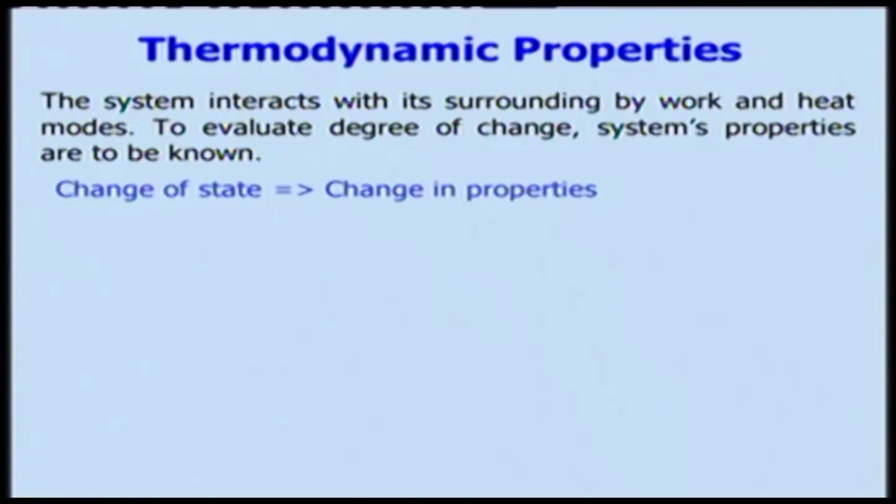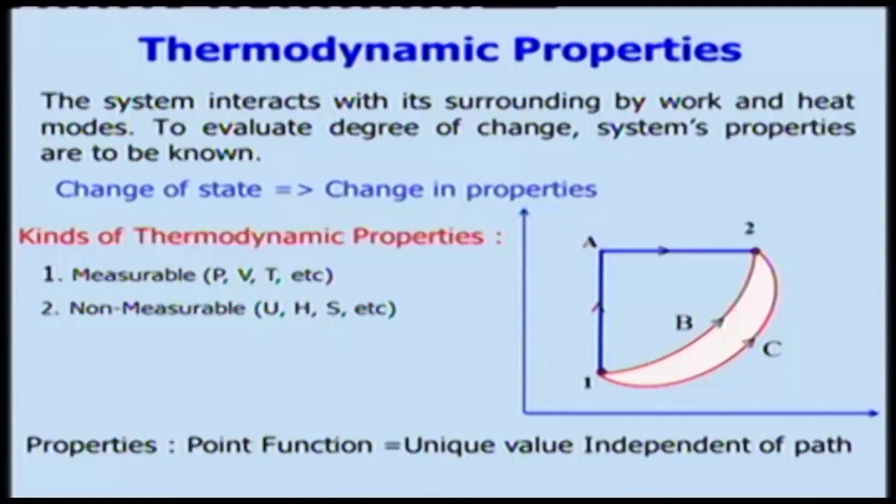So, what kinds of thermodynamic properties will we be handling? In other words, how can we classify them? We can classify them into two kinds. One is measurable properties like pressure, volume and temperature, which we can measure. But there are some non-measurable properties like internal energy, enthalpy, entropy, Gibbs free energy, Helmholtz free energy and other things.

So, we need to learn how we can obtain those non-measurable properties by using the data of measurable properties. That means we need to create ways and means of connecting the measurable and non-measurable properties, which we will be doing later on. But here we will be looking at these properties for a pure substance, because substances can be of various kinds.

Question arises: what do you mean by pure substance? For example, if I take brass and copper, can I call it a pure substance? Is brass a pure substance or copper? Which one? Naturally copper. But is that the sense we talk about here? So, what do you mean by a pure substance?

For example, if I take nitrogen gas, and I take air having constituents of mainly oxygen and nitrogen, neglecting other gases, can I call it a pure substance? Air I cannot say is a pure substance, am I right? Some of you are agreeing with my statement that air cannot be a pure substance. We will see as we go along whether you are right or wrong.

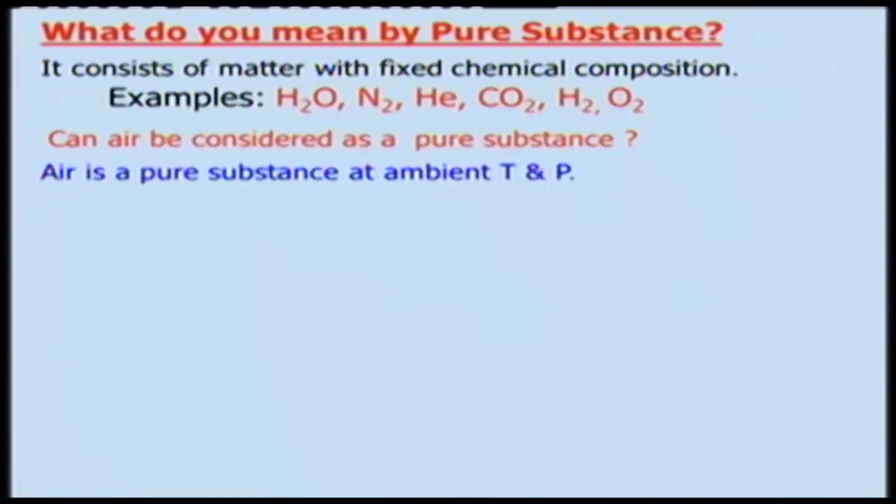You cannot separate the oxygen from nitrogen unless you do some separation procedure, like some kind of membrane you will have to use to separate it. Or how can I separate oxygen from nitrogen? One can think of using a membrane. Is there any other way of doing it? How? You can think of liquefying it, right. If you liquefy it, then one can think of separating it out. So, at ambient temperature and pressure, it will be uniform in chemical composition. Therefore, we can call it a pure substance.

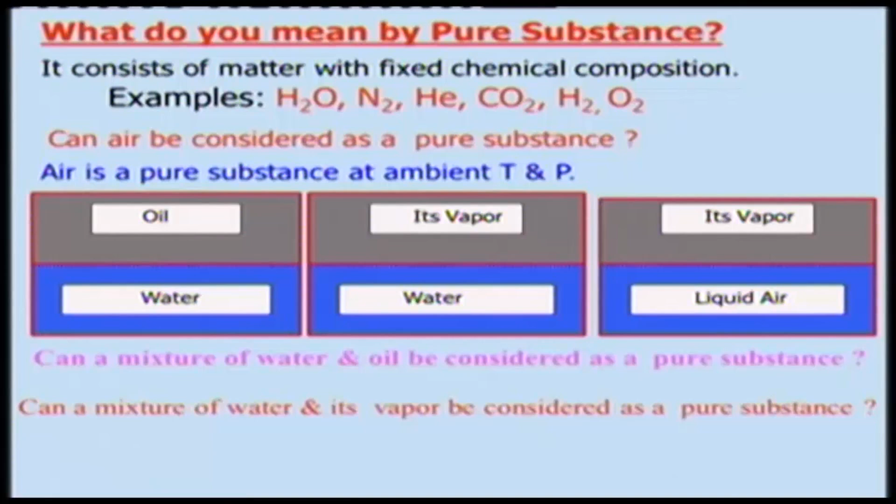Let us say water and oil, right, what will it be? Can a mixture of water and oil be considered a pure substance? Similarly, if I take water and its vapor, can I call it a pure substance? And if I take liquid air and its vapor, can I call it a pure substance? These are three examples I have given. Liquid air and its vapor cannot really be a pure substance, yes or no? Because the compositions of the liquid air and its vapor need not be the same. So, therefore, it cannot be.

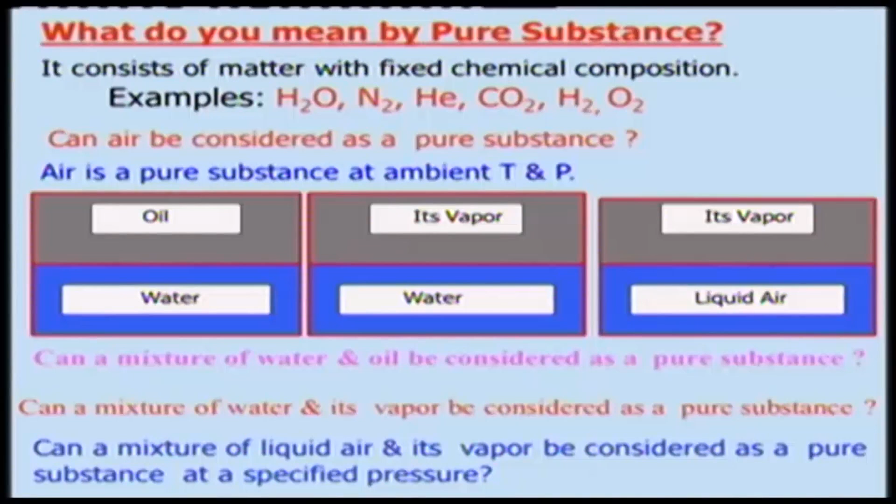And similarly, for water and its vapor, can we call it a pure substance or not? We can definitely, because the same water molecule will be there, whether it is in the liquid state or the vapor state. So, therefore, we can call it a pure substance. And water and oil we cannot really call a pure substance, because they have different compositions.

So, now we will be talking about a phase. What do you mean by phase? Phase is basically a distinct state in which matter remains homogeneous physically and chemically. If it is chemically homogeneous, what do we call it? We call it a pure substance, right. But here not only chemically homogeneous, it should be physically as well. A common example: in summer you get some ice water. The ice is in the solid phase and the water is in the liquid phase.

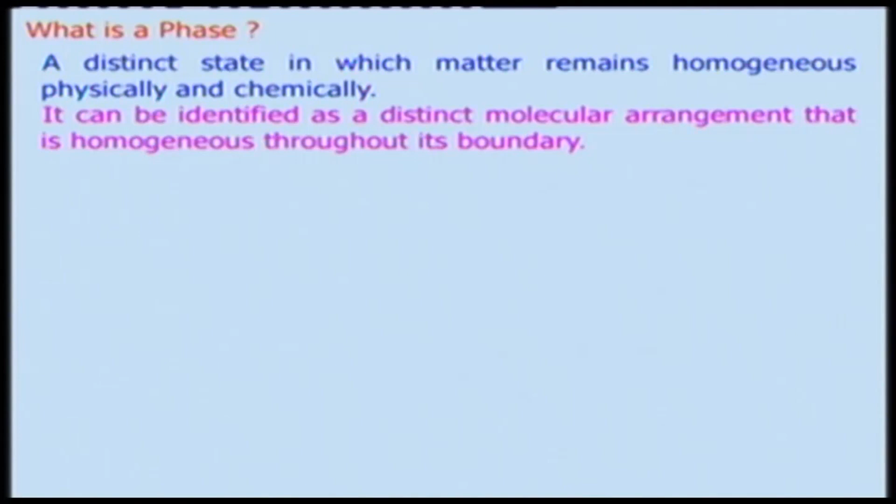This can be identified as a distinct molecular arrangement that is homogeneous throughout its boundary. As I told, the ice will be solid, so it will have a distinct boundary, and that boundary which separates it from its liquid we call the phase boundary. Another example: this is water and its vapor, and this is the phase boundary, where water can be converted into vapor. There is a water level you can see, and that itself is known as the phase boundary.

So, phases can be broadly divided into three categories: solid phase, liquid phase and vapor phase, right. And thermodynamic properties of a substance change abruptly at the phase boundary, right. Yes or no?

Although certain properties, like intensive properties, for example pressure or temperature, will be remaining constant, there will be change of certain properties of the substance across the boundaries. For example, if you look at water and its specific volume, will it be the same as that of its vapor? It will be very different, right. Order of magnitude difference will be there.

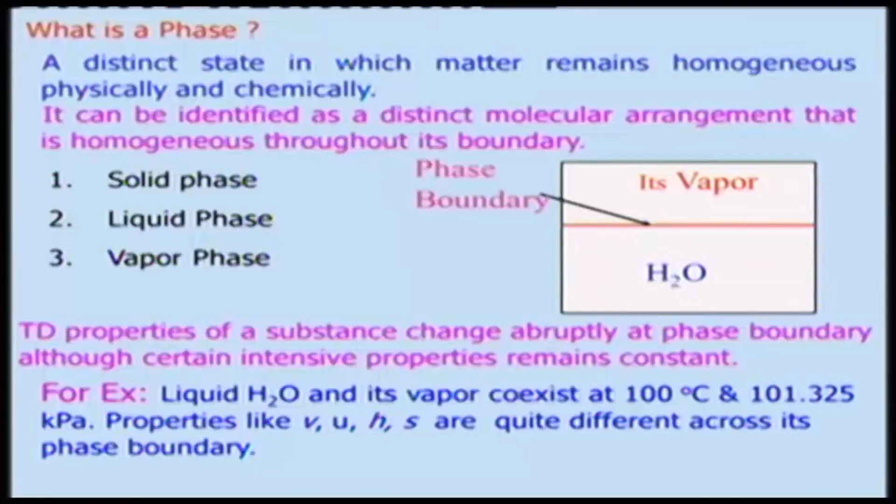To make it more concrete, liquid water and vapor coexist at 100 degrees Celsius and 101.325 kilopascals, but properties like specific volume, internal energy, specific enthalpy, entropy are quite different across its phase boundary. If you look at the numbers, the liquid and vapor will be quite different, which we will see either in this lecture or in the next lecture.

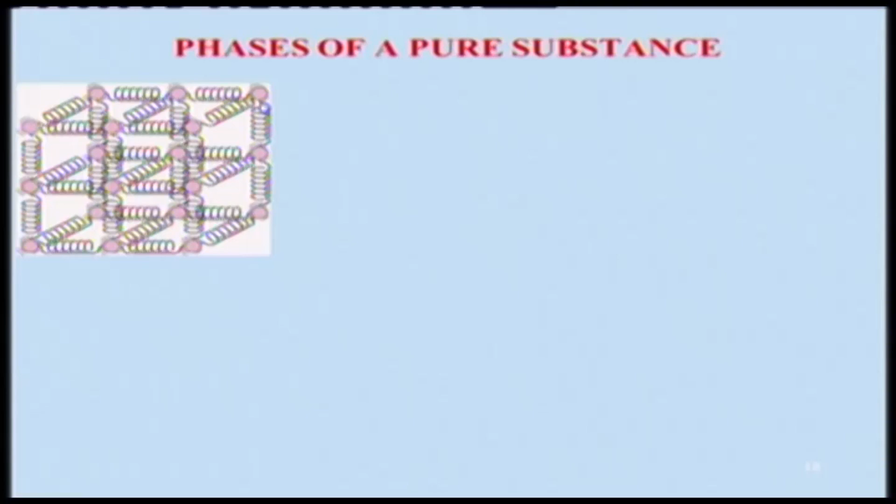So, let us look at the phases of a pure substance. This is a solid, which can be considered as a spring model. These are the molecules sitting over here, as if connected with a spring, and these molecules in a solid are kept at their position by large springs, like intermolecular forces. This is a model; what exists between the molecules in a solid is the intermolecular forces, which will be quite large, and there will also be repulsive forces.

Repulsive forces will be there only when these molecules come very close to each other, when the distance between the molecules tends towards 0. These molecules will be vibrating, and they are repeated. This pattern is what we call a lattice structure. It will be repeated, and they will be together. The intermolecular forces are quite high.

If you consider the earlier days in our family system, there was a lot of intermolecular force; people could take more resistance. If you apply a force or stress, they could take it, and today it is not, if you consider.

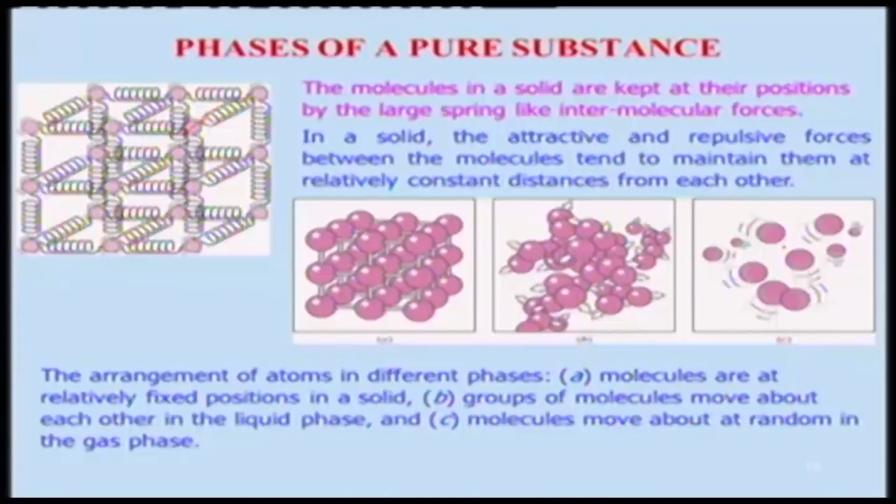So it became a fluid or a liquid, and if you give more energy, then they separate out, the molecules will be far away, and they move in a random manner in the gas phase. They will be interacting, but very rarely, and the interaction takes place through molecular collisions.

If you look at our country, in earlier days people had a lot of forces, togetherness was there, and a few years back we were liquid, now today we are in gaseous state and moving randomly, although each molecule has a higher energy level. Therefore we get a lot of stress and strain in our life. What I am trying to emphasize here is that solid is similar to our earlier culture of family, where the family bond in a village was stronger.

Today, it is broken, and therefore we become gaseous state, and then we will be facing a lot of problems. So, one has to look at that. So, now if you look at these things, in the low temperature the solid phase will be there; atoms and molecules are held tightly in place, together. And as the temperature increases, molecules will be separated from the places they were occupying in a very secure manner. Of course, molecules will remain together, but move relatively freely, not in a fixed position like a solid.

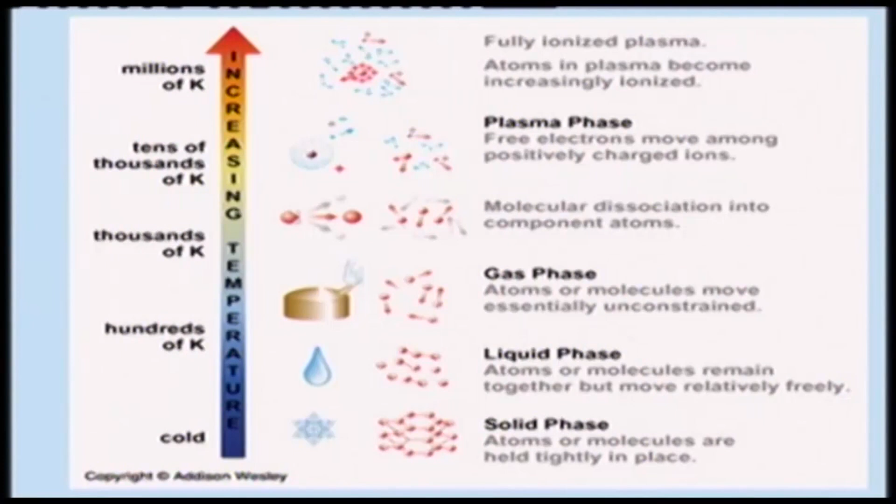So, this is the kind of phase change that occurs, and we will be discussing more about that. And let us look at how all substances change their specific volume when subjected to change in pressure and temperature. For example, if I take a solid rod which is elastic in nature, and a force or a temperature is applied to it, there will be expansion. When I remove that force or the temperature, it will contract. Now, those changes will be quite small.

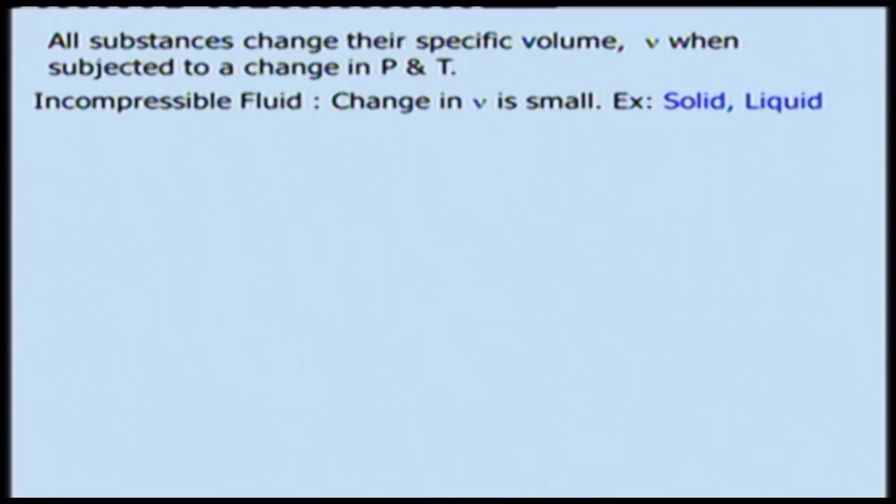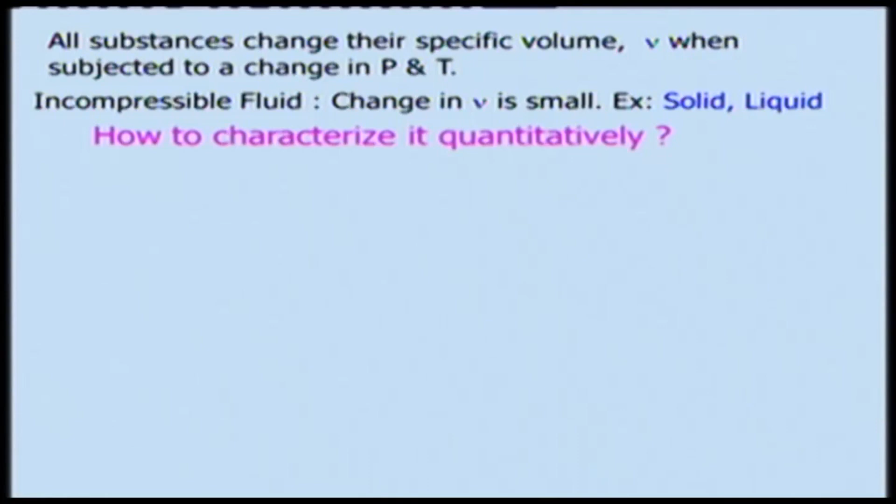If I consider a gas where I apply the pressure or the temperature, the heat, then expansion will be very high. Therefore, the change in specific volume in the case of solid and liquid is quite small as compared to the gas, and we call it an incompressible fluid, and where the change is very large, we call it a compressible fluid. Now, the question arises how to characterize it quantitatively, because we say it is a compressible or incompressible substance just by looking at the specific volume change with pressure or temperature, but how will we quantify it? Unless we have some number, we cannot really use it.

So, for that we will have to define two terms. There are two variables which can make changes in the volume, so we have to keep one of them constant. We are saying that temperature is remaining constant, and there will be change in volume per unit volume with the change in pressure when the temperature is constant. We call it isothermal compressibility, and keep in mind that this has a negative sign. Why the negative sign? Because whenever you apply a force and try to compress it, the volume will definitely decrease. So, V2 minus V1, and V2 is less than V1, therefore the negative sign comes here.

But we will look at another way of quantifying it: the coefficient of volume expansion, where pressure remains constant and temperature changes. So, beta is basically 1 over V into dou V by dou T when pressure is constant. Beta is a positive quantity, known as the coefficient of volume expansion, and this will be quite small for an incompressible substance. Also, if the isothermal compressibility is large, we call it a compressible substance.

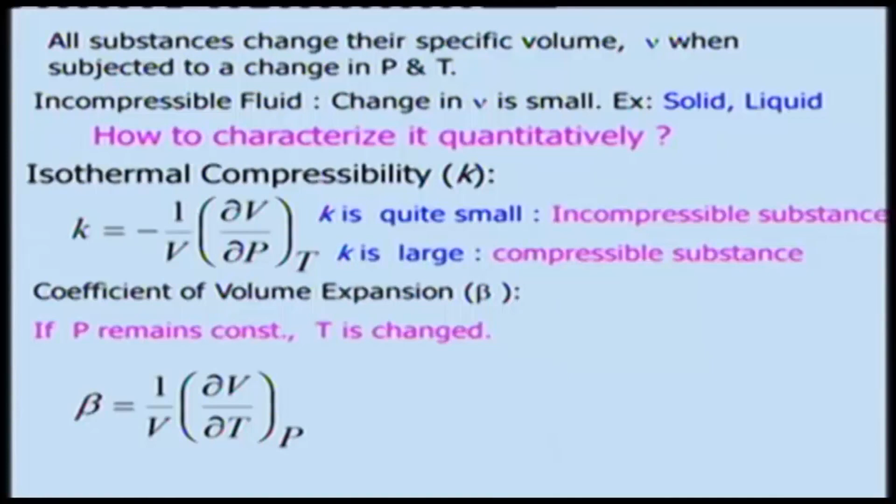And keep in mind that these quantities will be very useful for deriving the non-measurable properties by using the measurable properties. For example, volume, pressure, temperature are all measurable properties. We will be using these coefficients, either the isothermal compressibility or the coefficient of volume expansion, to connect the non-measurable properties with the measurable properties and vice versa.

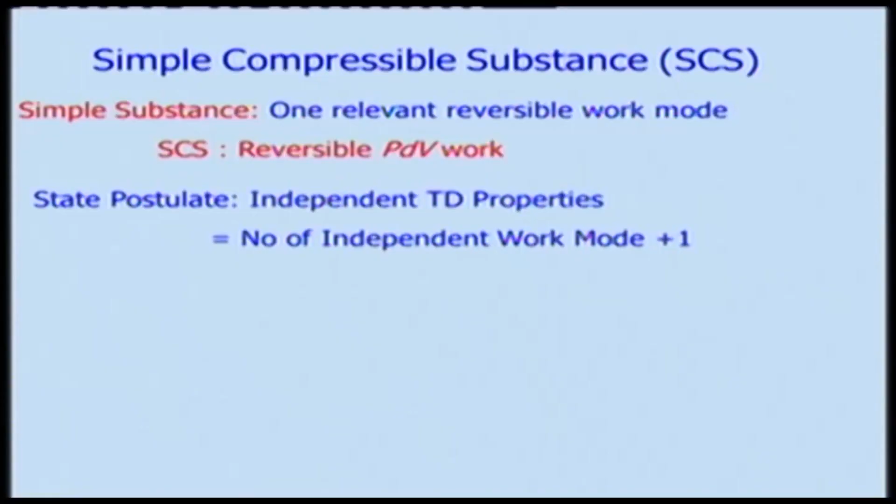So, let us look at the simple compressible substance, which we will be dealing with in this course. It is one in which one relevant reversible work mode is used, and that we call the simple compressible substance. As we know, the state postulate says that the number of independent thermodynamic properties that can be varied is equal to the number of independent reversible work modes plus 1. So, in the simple compressible substance the reversible work mode is 1, and therefore the total number of properties that can be varied independently is 2 in this case.

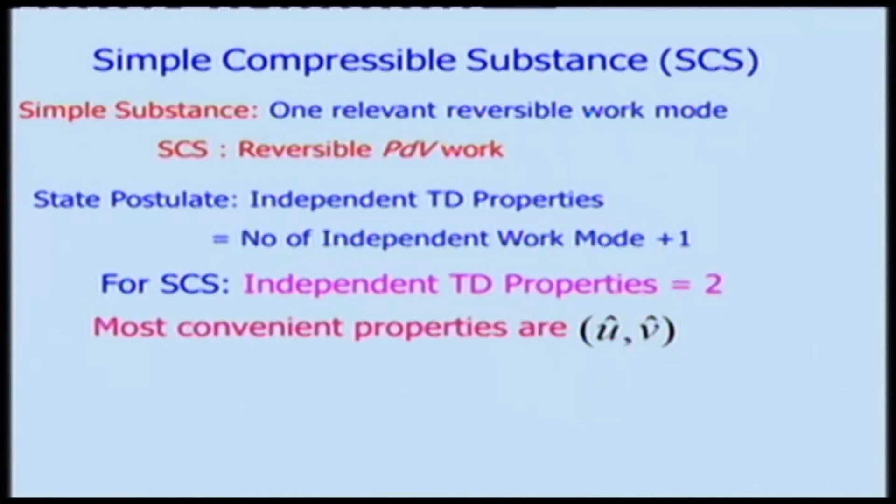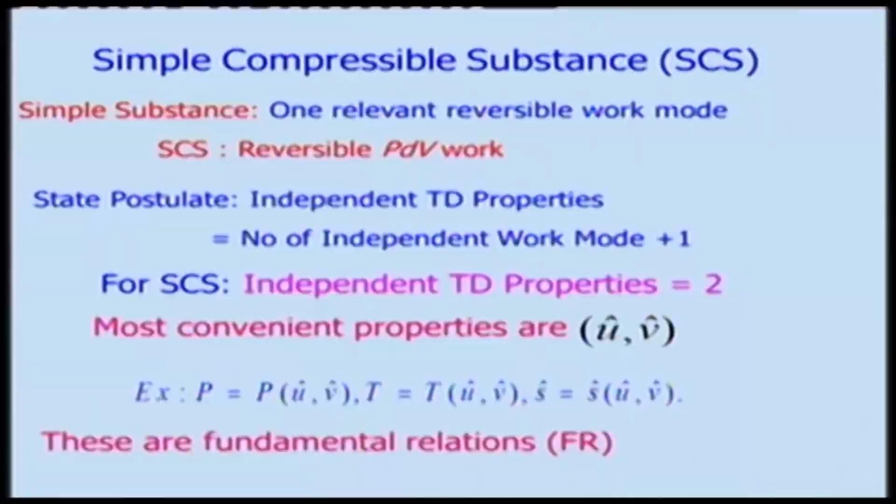So, the most convenient properties will be specific internal energy and specific volume. We can think of pressure as a function of specific internal energy and specific volume, and temperature similarly as a function of specific internal energy and specific volume. Also the entropy and other things, which we will relate to the other non-measurable properties later on, and these relationships we call fundamental relations, which we will be looking at towards the end of this course.

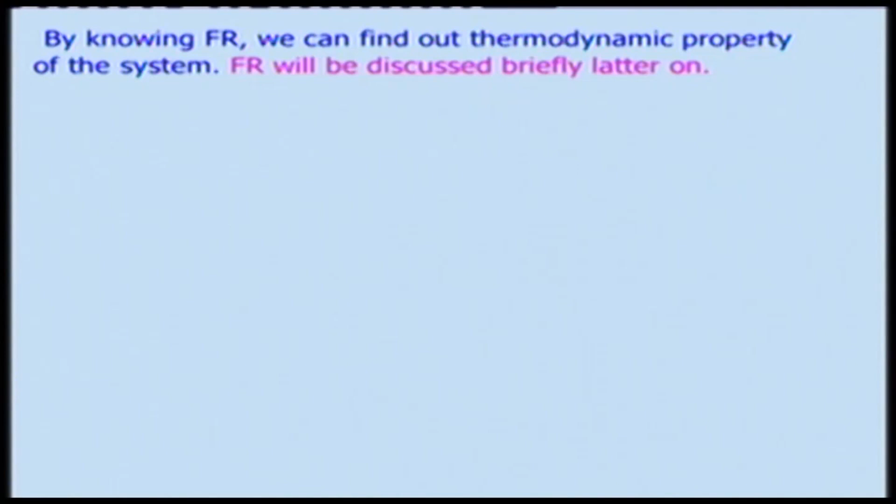And by knowing these fundamental relations, we can find out the thermodynamic properties of the system. As I told, we will be discussing these fundamental relations towards the end of this course. However, here we need to look at thermodynamic properties in mathematical relations. Either we can express them in terms of mathematical relations, or we can use data tables like the steam table, refrigeration data tables and other things. We can also use charts or diagrams to describe the process and also use the properties.

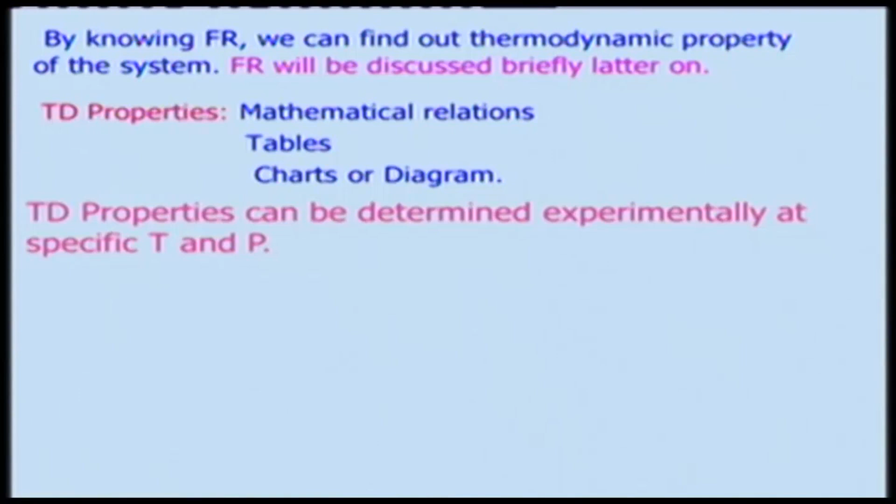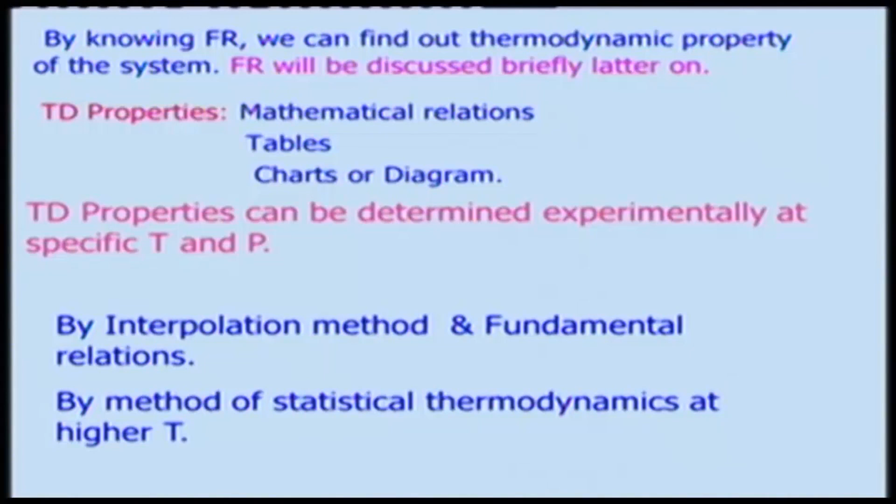So, thermodynamic properties, as I told earlier, can be determined experimentally at specific temperature and pressure by the interpolation method, and using these fundamental relations we can relate these experimental properties with the non-experimental properties. Another way is by using statistical thermodynamics at higher temperature, because all these properties we use are basically at low temperature, which we can measure, but at high temperature it is very difficult to measure. Let us say at 10,000 or 20,000 degrees Celsius, you cannot really measure it.

So, what will happen to this water? What properties will be changing? At 20 degrees Celsius, what will happen to the temperature of the water? Definitely it will increase, you are giving heat. And what happens to the pressure? Will it increase, will it decrease? It will remain the same, because you are applying the same 0.1 megapascal, it will not be changing. That means one can think of it as a constant pressure process.

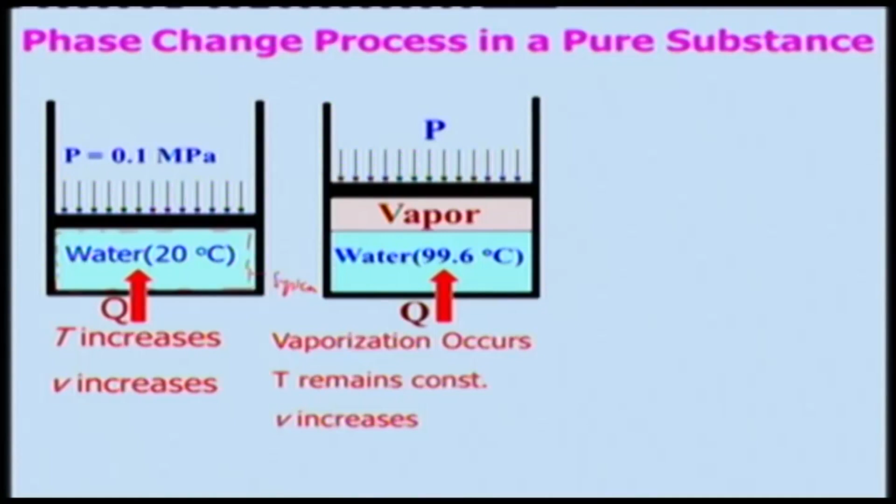And then what happens to the specific volume? Volume will increase, but the increase will not be much, because water at this point we consider as an incompressible substance. And this state at 20 degrees Celsius we call the subcooled state.

So, now what will happen if we go on? The temperature will be going up, like 20 degrees, 25 degrees, and then it will reach a water temperature of 99.6 degrees Celsius. What will happen at that point, with the pressure equal to 0.1 megapascal?

It will start boiling, right. Once it starts boiling, what happens to its temperature? It will remain constant; temperature will not change. Then the water bubbles will be going up, and then collected, and then vaporization will start occurring, right. And once this vaporization occurs, what will it be? It will be a mixture of water and its vapor, right.

And what happens to pressure? Pressure remains constant, temperature is also remaining constant, but the specific volume increases at a very high rate. Why? Because the specific volume of the vapor is an order of magnitude higher than that of the water, right. So, therefore, the volume will be increasing rapidly. And keep in mind that all these things are happening in a quasi-static process or quasi-equilibrium process, right.

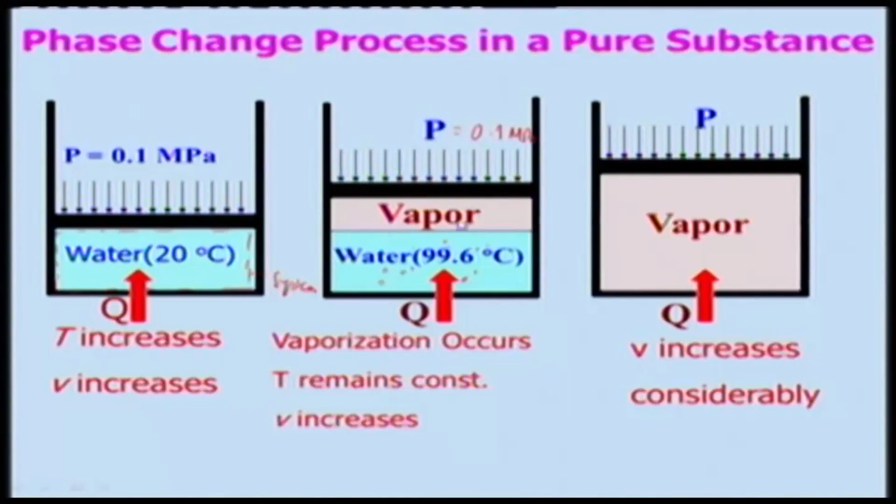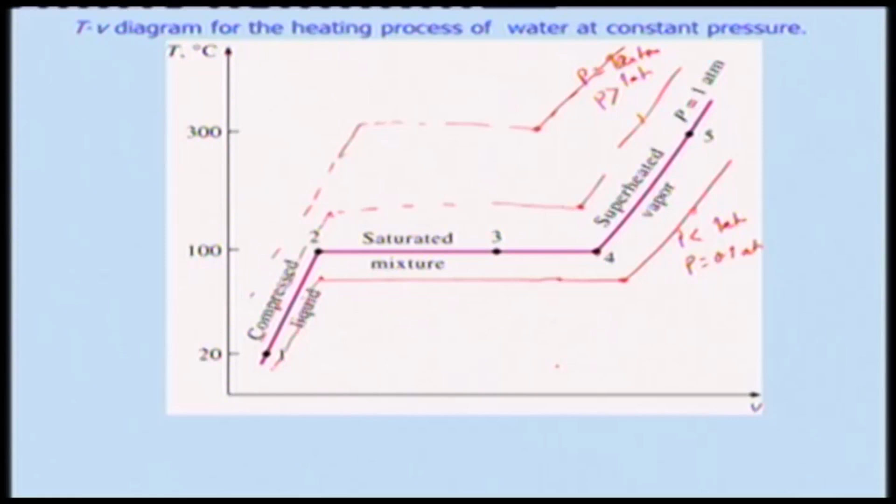So, I must emphasize this thing, as I told earlier, that if the entire process between state 1 and 5 is reversed by cooling the water while maintaining the same pressure, water will go back to state 1, tracing the same path. Then the amount of heat released will be exactly the same as the amount of heat added during the heating process. That is a very important point you should keep in mind.

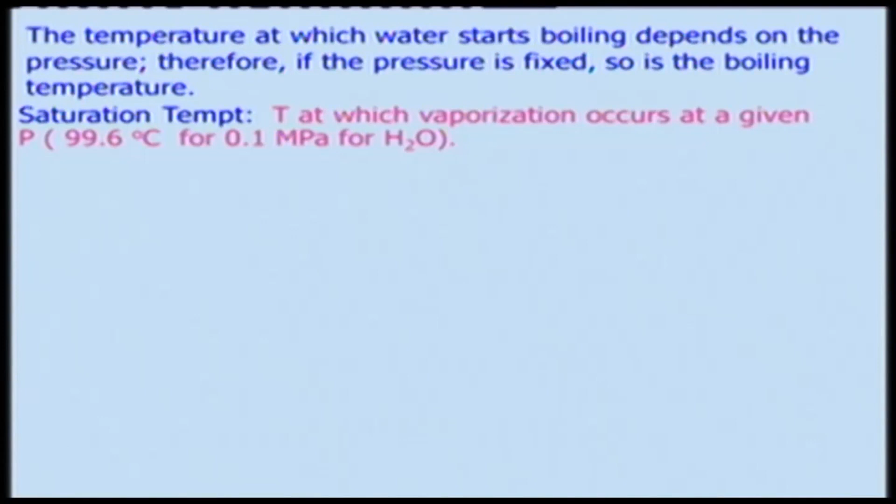And the temperature at which the water starts boiling depends on the pressure. We have already seen that. Therefore, if the pressure is fixed, so is the boiling temperature, and the saturation temperature for 0.1 megapascal is basically 99.6 degree Celsius for water, and the saturation pressure will be 0.1 megapascal for 99.6 degree Celsius water. I am saying saturation temperature, saturation pressure, because they correspond to each other.

And for a pure substance, the saturation pressure goes on increasing with the increase in temperature, right. So, what is its implication? Can I really learn something from this? In other words, based on this simple principle, can we devise something which can be useful for us? See, you might have seen your mother use the pressure cooker for cooking food. Am I right or wrong? Are you aware or not? Why is it so?

Pressure cooker, you must have seen, right? Yes or no? How many of you have not seen a pressure cooker? No, not a single. You have not seen a pressure cooker in your home. I am really amazed by this.

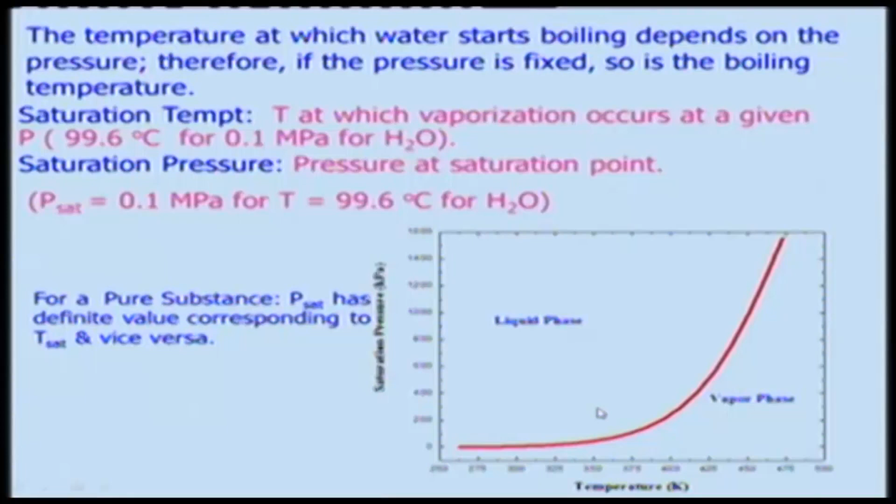That means what? Why is it so? If you look at this curve, let us say it is at a lower temperature or lower pressure, something around 100. At ambient pressure we know that water will boil at 99.6 degree Celsius, right. So, at a higher pressure, what will happen to the saturation temperature? It will be higher, right, yes or no.

So, if you are boiling at a higher temperature using a pressure cooker, in which the pressure inside will be higher than the atmospheric pressure, then you can cook easily or quickly, right. Generally, 2 atmospheric pressure is kept in a domestic pressure cooker. But the nutrient values of that food will be much lower than what you can cook at atmospheric pressure, but you want it fast.

For example, let me ask you a question, it is very interesting. Suppose you cook in a pressure cooker, you cook in a solar cooker, and you cook with a simple pan, same thing by the same person, which will be tastier? 3 cases I have told. So, which one will be tastier and why? You are not telling me anything, at least I was thinking you will tell me.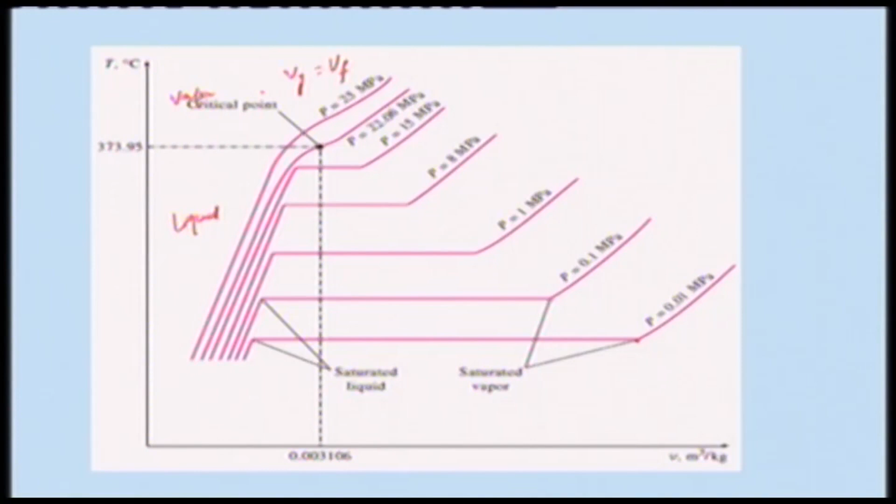That means the specific volume of the liquid and its vapor is the same. Are you getting my point? That means at this point, the critical point, V g is equal to V f. V f is the specific volume of the liquid. This critical point is very important, because it will tell me whether it is a liquid or a vapor. This is liquid, above this point we call it vapor, and above this point all this vapor we call superheated vapor.

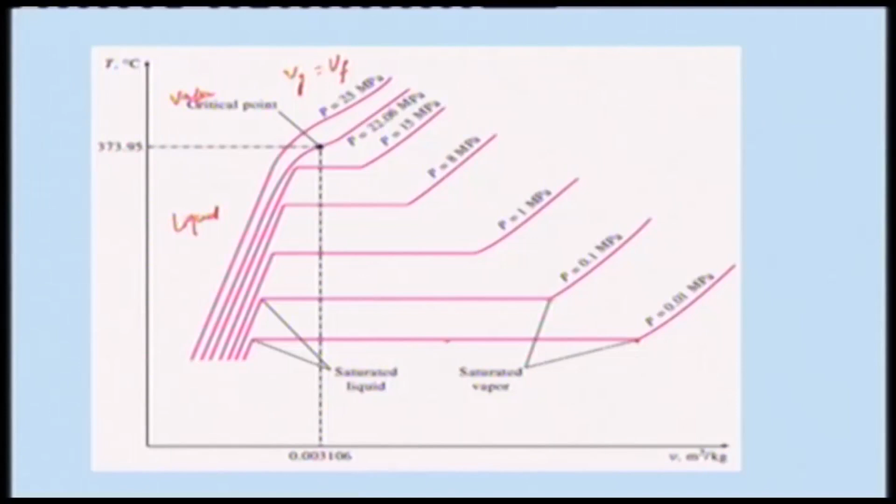And if you do that, then you will not have this wet mixture. This is known as wet mixture. Wet mixture means the mixture of liquid and its vapor, and that will corrode, and we will be discussing that whenever we talk about steam power plants and boilers; we will be encountering these mixtures, which cause corrosion and other problems. Nowadays people are using supercritical boilers, because they operate at a very, very high pressure, so the liquid instantly gets into the vapor, and you avoid the wet mixture of vapor and liquid.

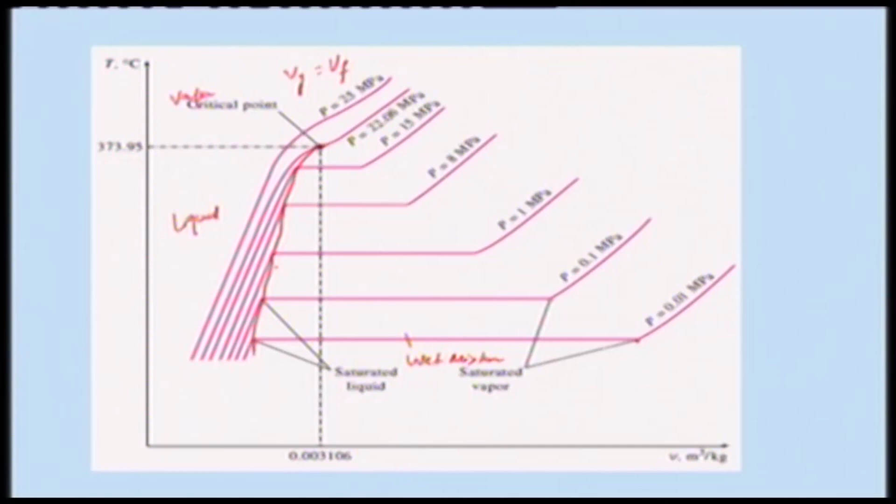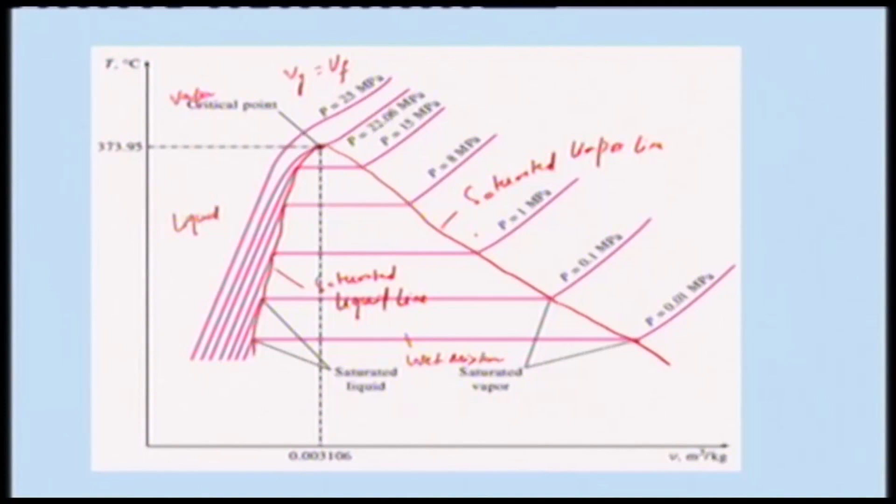So, if I join these points, this line is known as what? Saturated liquid line. This line is known as the saturated liquid line. And similarly, if I join these points over here, this is known as the saturated vapor line. And keep in mind, this slope is steep and this is a little flat, and in between these two lines the wet mixture will be there, a mixture of vapor and water.

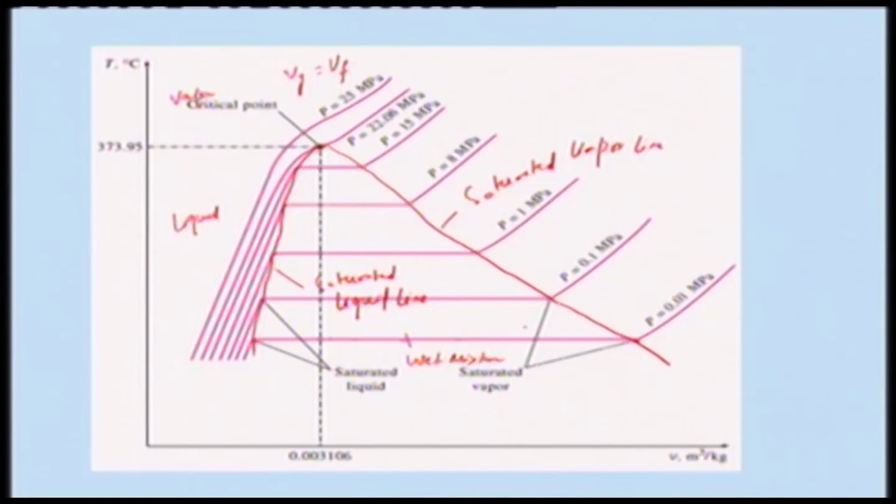And the question arises, what would be the percentage of water and the percentage of vapor? In this case, the percentage of vapor will be 0. Here, at this point, the percentage of vapor will be 100%. So, we will be defining quantities for that, and also look at how to find these properties, because we will be interested in evaluating properties in these mixtures also, like internal energy, enthalpy, entropy. The properties will be available here and there, but we need to find them in between. That is the challenge; we will look at how to do that.

So, let us look at some of the critical point pressure and temperature data here. For water, as I have already told you, the critical temperature is 647.39 at a critical pressure of 22.07 megapascals, and this is the critical volume.

And various other substances I have placed in this table: carbon dioxide, oxygen, hydrogen and helium. Interestingly, the critical temperature for helium is very, very low, 5.3 Kelvin, and the pressure is about 0.23 megapascals. The others are in between, but most metals have a higher critical temperature than water. So, metals have higher critical temperatures at which they will be vaporizing.

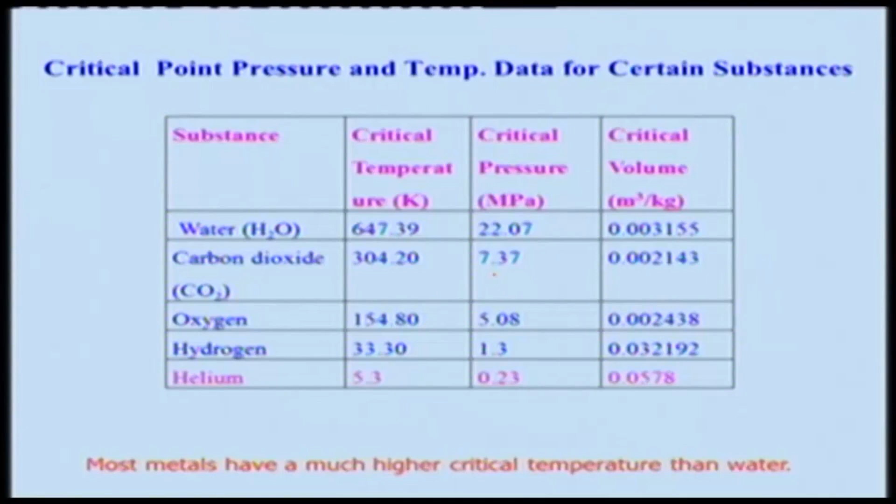So, just to have a feel for this and to summarize, we will say that this is your saturated liquid line and this is your saturated vapor line, and this is your constant pressure line, P is constant, and this is another constant pressure line, where P2 is greater than P1.

And this, as I told, is the compressed liquid region; people also call it the subcooled liquid region. And this is your superheated vapor region. In a power plant we always try to use superheated vapors. We need to avoid the saturated liquid and vapor mixture. So, this is a T-v diagram where the properties and processes can be described.

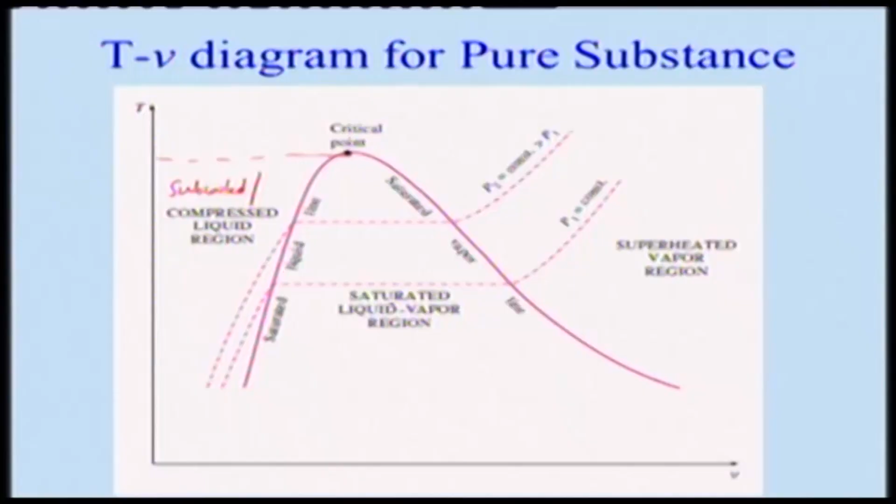And let us look at saturated liquid and vapor mixtures, because we will be interested in how to handle them. So, we will define a quantity x, which is nothing but mass of the vapor divided by total mass. Total mass means mass of the liquid plus mass of the gas or the vapor.

So, this we call the quality. It indicates how much mass of vapor is there with respect to the total mass of the mixture, and we will be using the symbol f for the liquid, because historically this has been used; the word comes from German. And this x quality we call the steam quality.

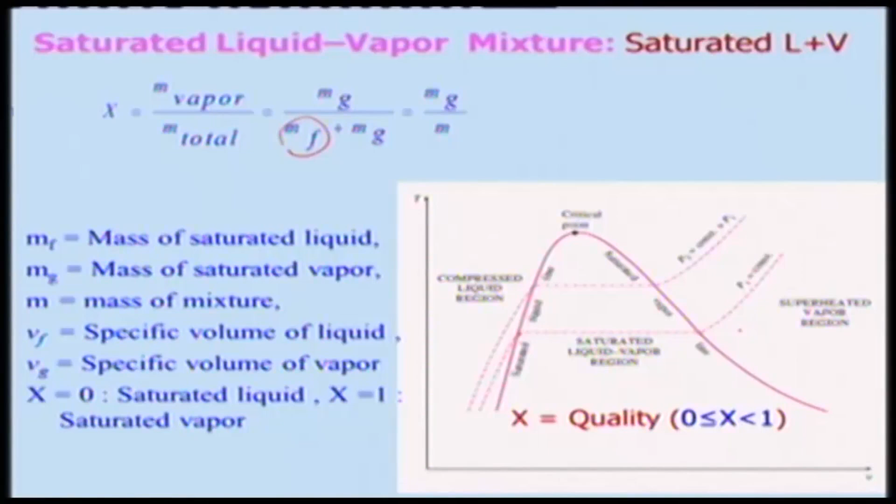As I told, x will be 0 here and 1 here; in between it will be between 0 and 1. It can be 0.1, 0.2, 0.5. 0.1 means that if there is 1 kg of mass, 0.1 kg will be the gas or the vapor in that.

So, the total volume V is mass of the fluid into specific volume plus mass of the gas into specific volume of the gas, and the total mass will be mass of liquid plus mass of gas. If I divide this by the mass, what will happen? By definition, this is mg by m, where m is the mass of the mixture and mg is the vapor. This is nothing but x, the steam quality.

So, this becomes 1, and this is x. So, this is mf by m plus x, and mf by m is 1 minus x. Putting this in, the specific volume is v = (1 − x) vf + x vg, and we can also write v = vf + x vfg, where vfg is vg minus vf. Therefore, x = (v − vf) / (vg − vf).

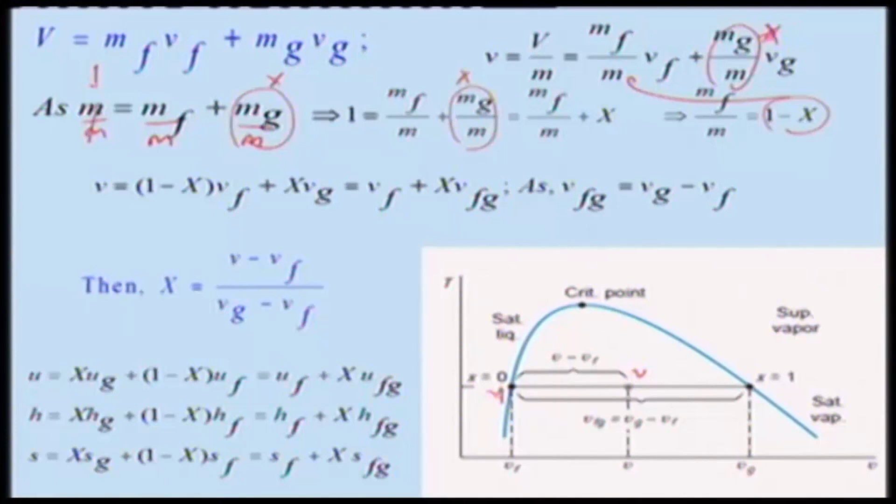So, knowing this quality x, I can find all other properties like internal energy, enthalpy, entropy, because if I know ug at this point and uf at this point, I can find out in between. Similarly enthalpy, entropy and others. We will be using this quality in our calculations later, and by knowing it we can find properties of wet mixtures.